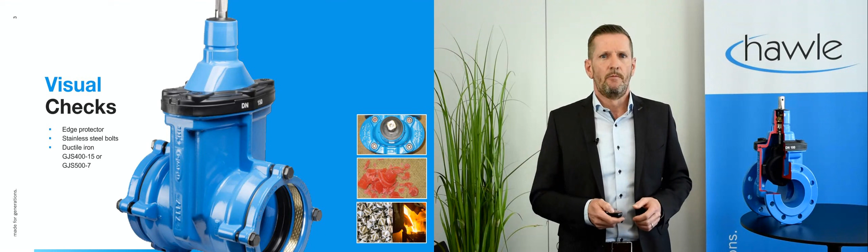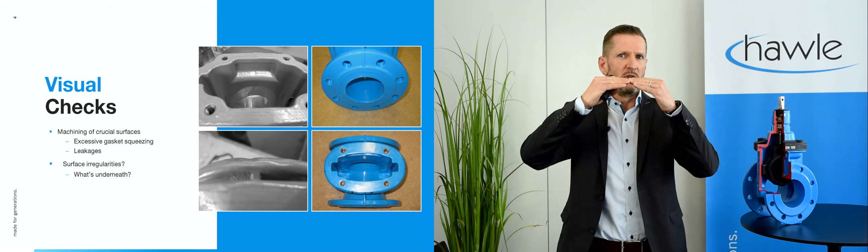Once the bonnet is removed, you get a better insight into the valve. Crucial surfaces like the bonnet flange should be machined evenly. If not, like on the top left picture, the demolding slopes are still there. In such case, the gasket will be squeezed excessively in the center part, whereas it will kind of hang loose in the edges. Definitely that can cause leakage in the long run.

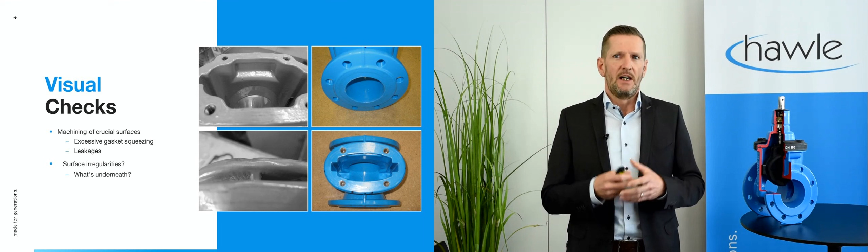And if you see a flange with such dents, like on the bottom left picture, you should ask yourself the question, what could be underneath? Cavities or lumps in castings aren't that seldom and definitely detrimental for longevity.

The bonnet gasket should interlace the bonnet threads in order to prevent water or moisture entering the threads in the bonnet. When using stainless steel bolts and sealing compound as shown in the previous slide, you will have triple safety, so no corrosion can take place. If the bonnet threads remain unprotected, corrosion is inevitable.

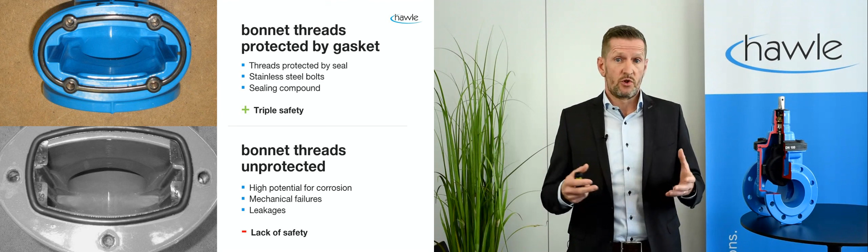Now, some other reliability aspects which I personally never thought of when I was just a user of gate valves. A fully coated bonnet, also on the inside, specifically in the grooves, is crucial. You shouldn't take it for granted that this is the case with all gate valves. A double bayonet is the best solution as it offers double safety for unwanted slip out followed by a so-called spindle blowout. In our E3 valve, we have even additional safety screws to prevent it.

The amount and the diameter of seals also matters for the long-term performance of a valve. Then there should be sliding discs on both sides of the spindle collar. Again, something that not all valves have. Needless to mention that such valves will wear out in no time. And finally, a wiper ring on top shall prevent dirt ingress into the spindle sealing and spindle bearing area.

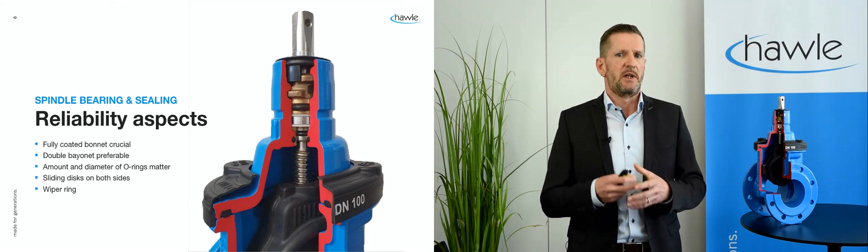As indicated in the previous slide, on the top pictures you can see how a fully coated bonnet should look, and also seals of adequate diameter in a sturdy O-ring carrier made of brass. The bottom picture shows a bonnet with uncoated spots in the spindle sealing area, and I think it is self-explanatory that these thin O-rings in a plastic bush on the bottom right picture don't create much confidence.

Technical guidance says that O-rings below 3 mm diameter should not be deemed to have a long-term sealing function. They are rather considered as spacers to hold something in position.

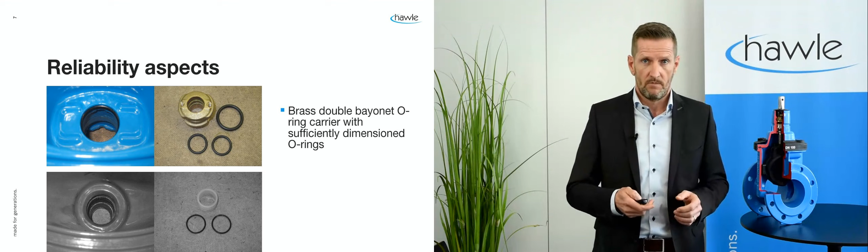Some other simple basic checks once the gate valve bonnet is removed are: does the groove for the wedge guiding in the bonnet have an absolutely smooth and even surface? If not, it won't take long until the coating is rubbed off by the wedge.

Is the wedge fully vulcanized? Any exposed ductile iron will result in corrosion eventually. Does the valve have attached plastic wedge guides for reducing friction?

I have seen valves which run on rubber, which implies high wear and tear when actuated. A form fit of the wedge nut on the wedge with some freedom of play is the better choice, as a press-fitted nut could slip out. In addition, a press fit creates a rigid connection that can't absorb a water hammer during closing, for instance.

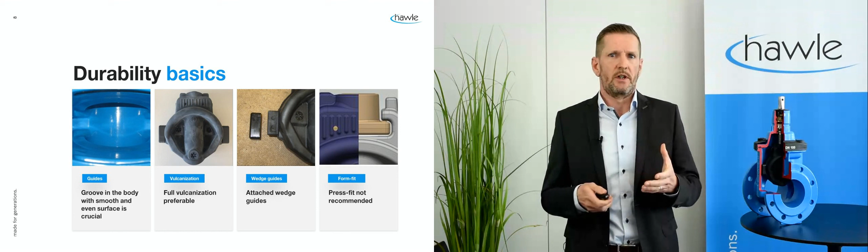Then, the thread in the wedge nut should have a ratio to the spindle diameter of minimum 1.2. The more threads, the longer it will last. When the valve is fully opened, the coating should not be touched by the wedge, because that will damage either the rubber or the coating of the valve after a while, or even both of them.

The brass material which is in contact with the water should be lead-free. It is well known that lead in pipelines is a serious health hazard. The sealing behavior of a valve can also be tested by spreading chalk on the body, followed by closing the valve. The broader the imprint on the body, the better the sealing.

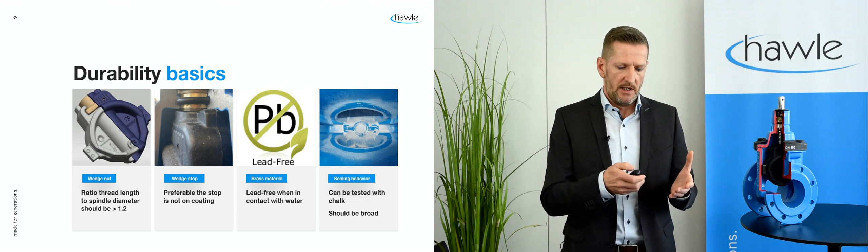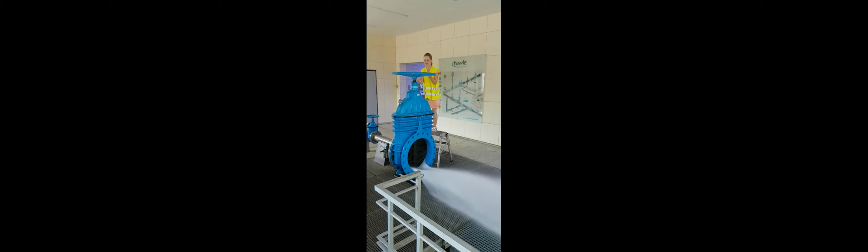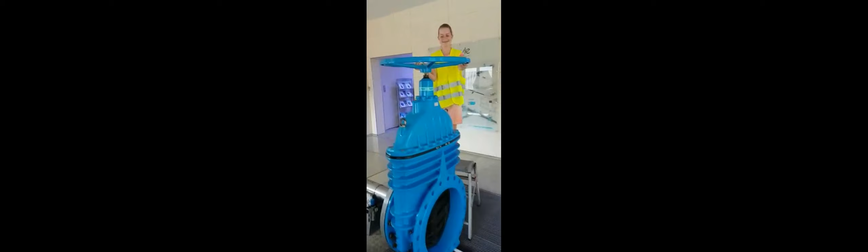And before I come to the end, I have a question for you. Do large gate valves need a bypass to operate easily? The answer is definitely no, even at a differential pressure of 16 bar. Therefore, more than 90% of our gate valves of diameter 500 and 600 are sold without bypass, due to its easy actuation. But of course, the option for a bypass exists for those who really want it.